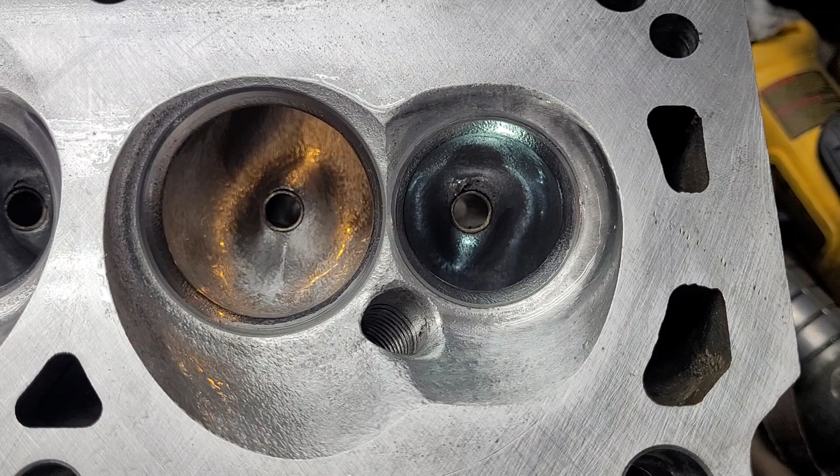Okay guys, final on the AFR Enforcer clone heads, the 20816. I was able to squeeze a tiny back cut on the intakes. No back cut on the exhaust - I tested it with a back cut, and it was not good.

If you take a good look at the chamber, you can see it's textured in some spots and baby smooth in other spots. It's all for a reason. Eric did a nice video on textures and what he feels they do in certain spots - it's quite a good video.

These turned out pretty nice. I'm relatively happy with them. They did take more time to finesse than I would have expected, but they turned out nice. I think he'll be very happy with them.

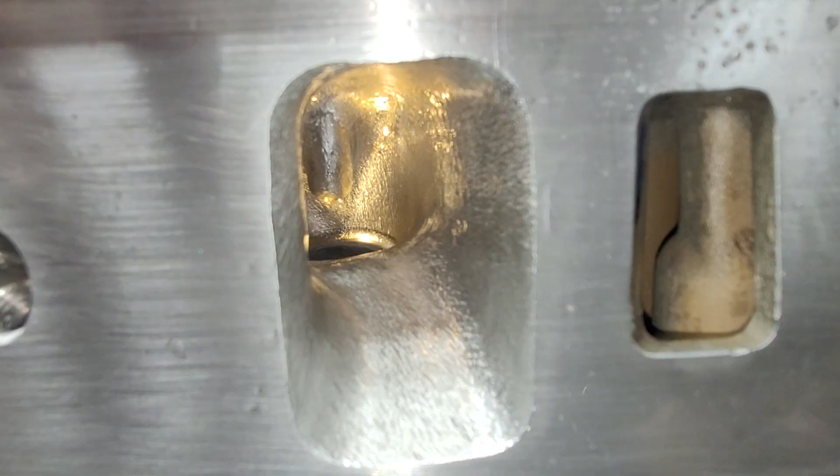All right, I put a coat of oil on everything because these are gonna get shipped out soon, real soon - like they're gonna get put in plastic bags and put in the boxes type soon.

Okay, take a look at the exhaust. The exhaust actually got completely redone. I really wasn't thrilled with how they were running, and I really wasn't thrilled with the valve seat because it had some serious pitting from the detonation. So I did have to sink the exhaust valve seats a little bit. But since the 208s were brand new, I left them as high as I possibly could.

So the chamber CC came out right about, I think it was 61, which is good. I think they come from the factory at like 58 - I may be wrong with that, but that was actually from the AFR website, 58. And after I do my chamber work on it, that's definitely going to open it up a few cc's. So 61 sounds right.

Let's take that shot with a little bit of light on it. Even though it's aluminum, I like to put oil on it because the aluminum starts to change color - it gets a little oxidation in it and it looks like crap.

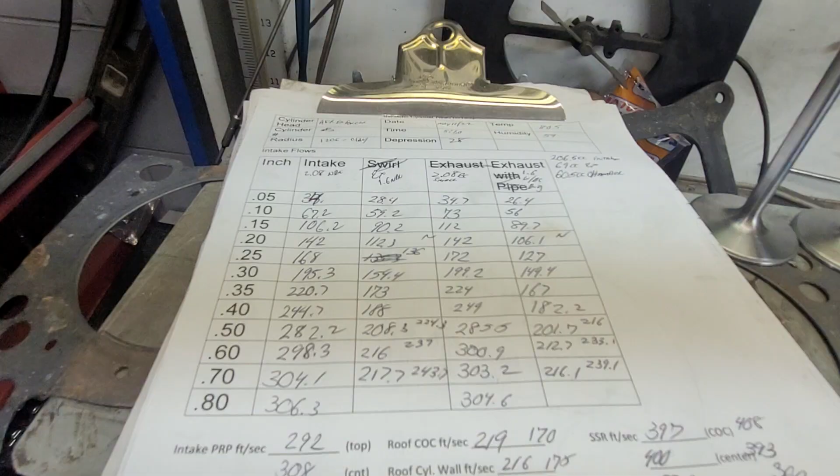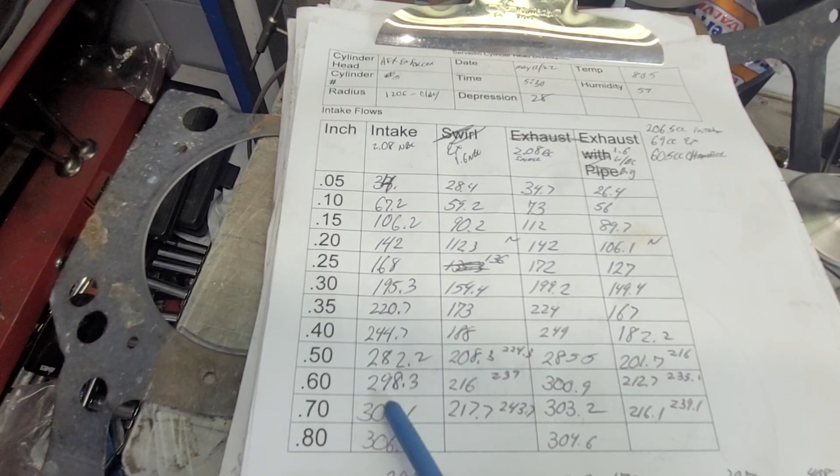Okay, let's see what we can do with this. This is a 208, no back cut. They're up a little bit from last time you guys saw them - not a huge difference, but I got some decent gains.

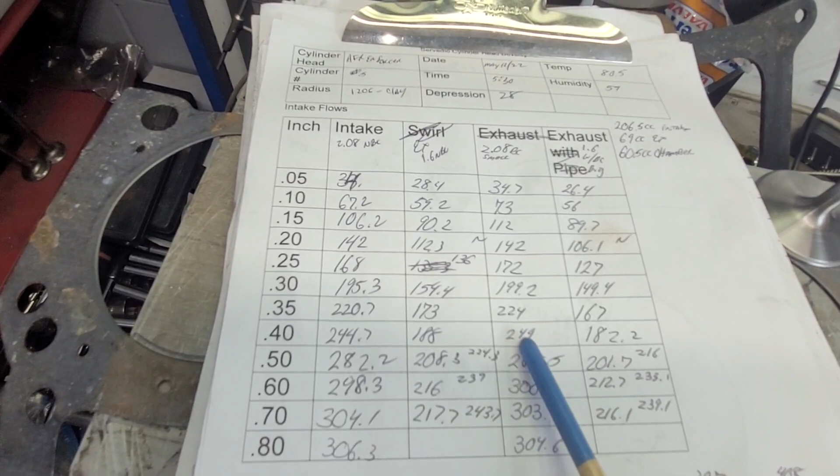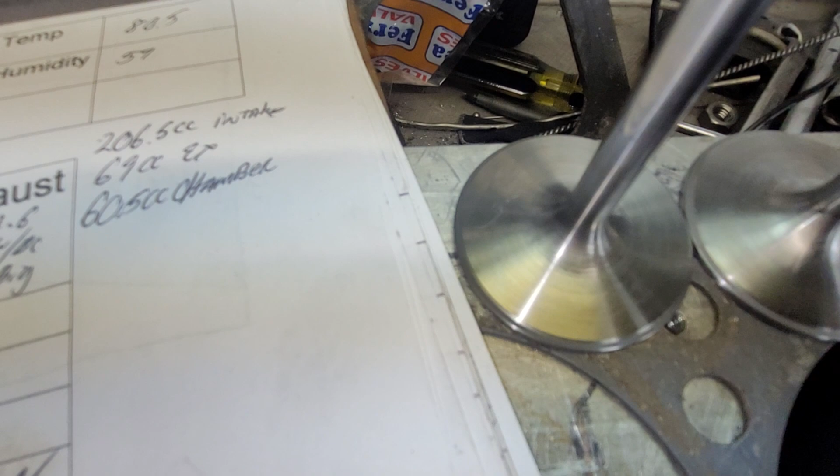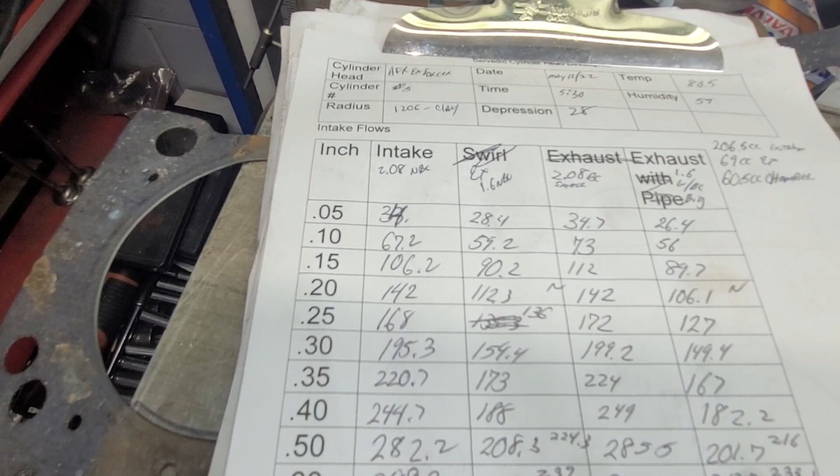Coming down, a couple CFM here and there. But the back cut wound up being a very small back cut - you can only put a tiny back cut on it because of the style valve it is. But it did help, and it brought up my mid-range a little bit, which I was happy about. And right where he's running, we're still around 300 CFM.

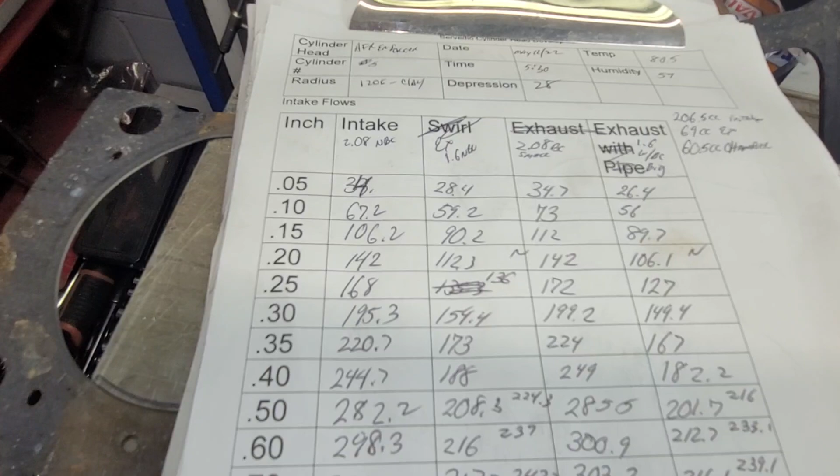So with the intake manifold, we got about 288 last time. They're pretty good, I'm pretty happy with them.

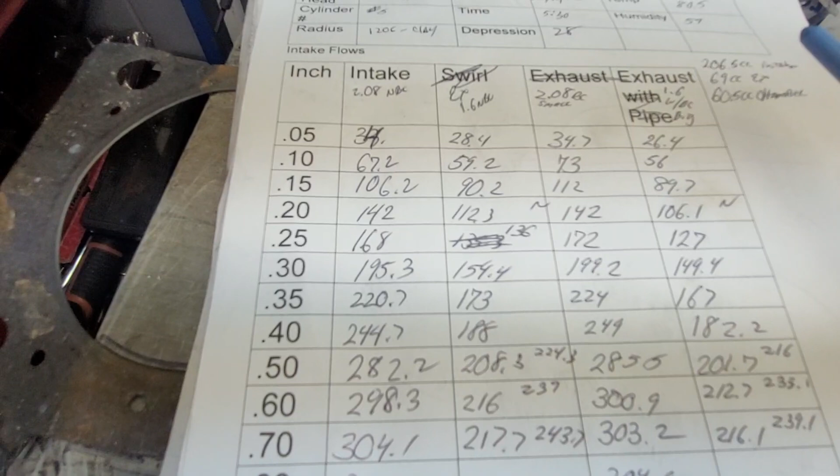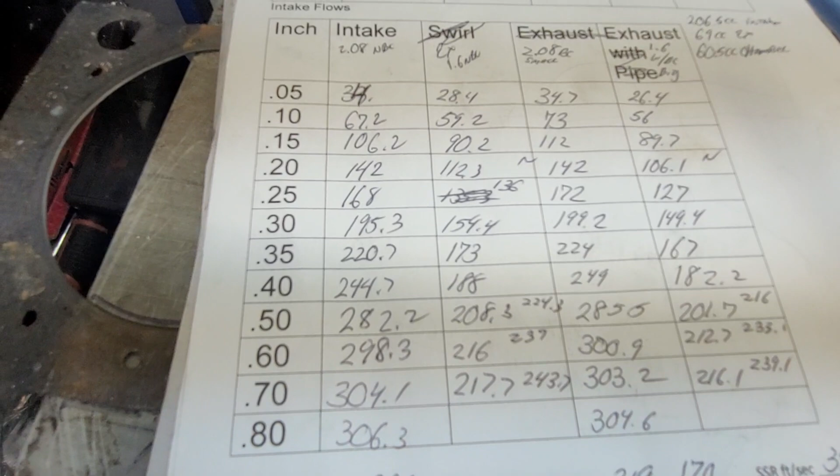Now, I did want to talk about how you know you're done. This is something that Charlie has a big problem with - when are you done with the cylinder head? I think I talked about this one other time, but you're done - well, this is like a rule of thumb from me - you're done when you've got the size about where you want it to be.

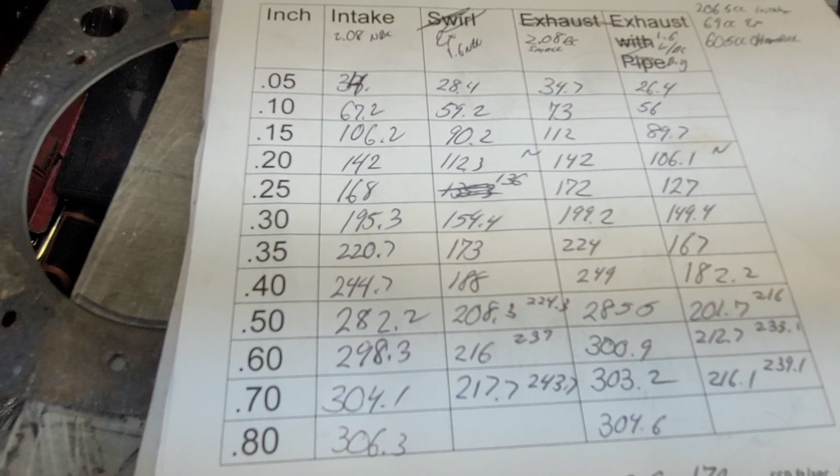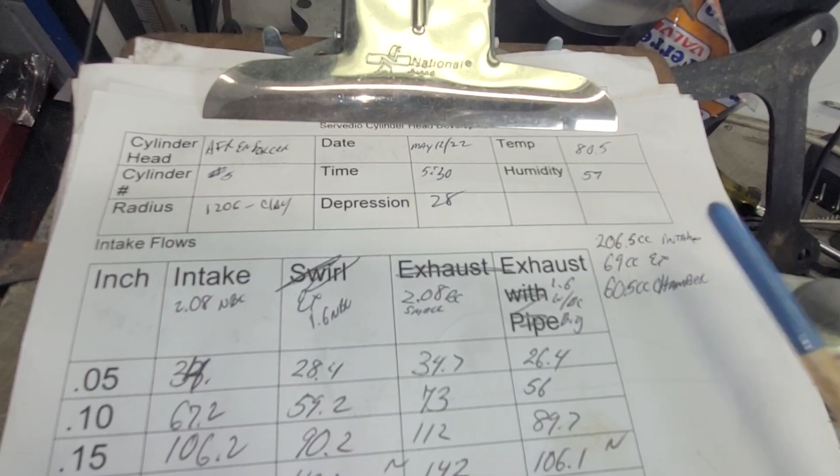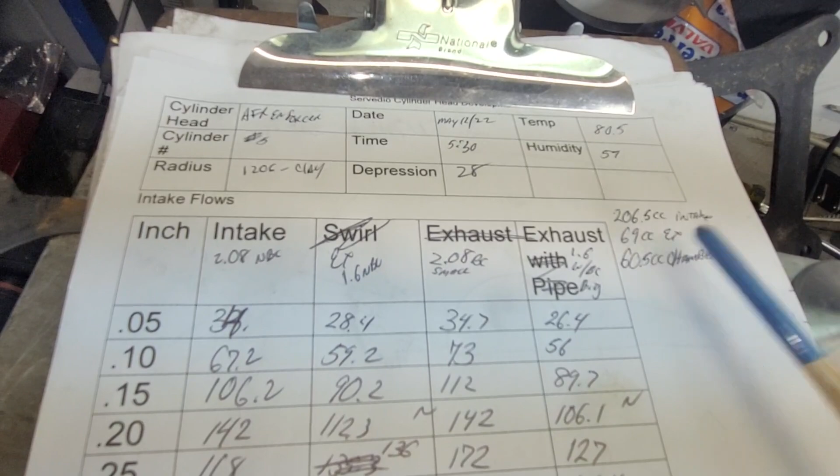Now, these ports came out - I wrote 206, I thought it was 205.5. All right, I wrote 206, so they're 206.5 cc's. And the exhaust came out at 69. Oh, I got a 60.5 cc chamber.

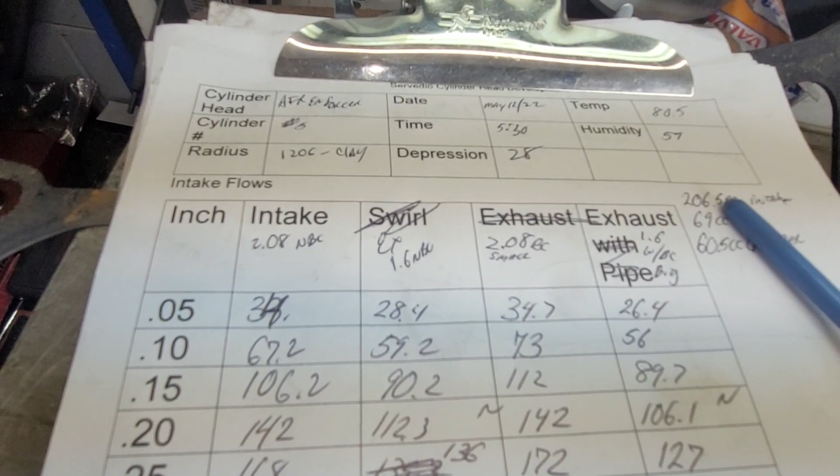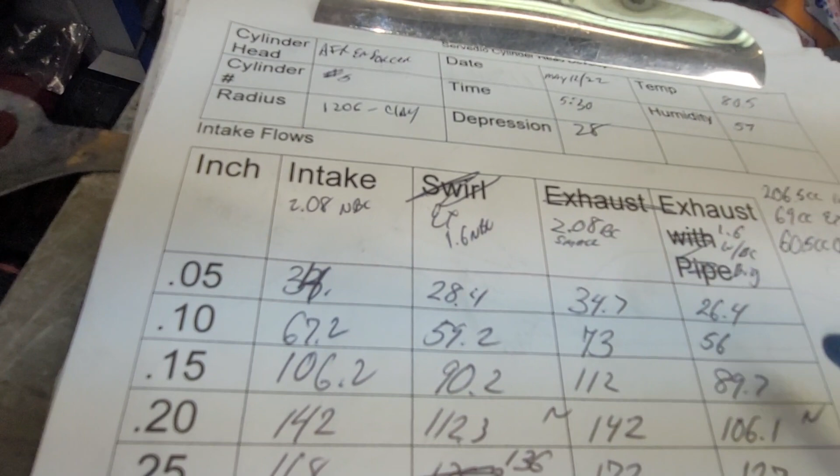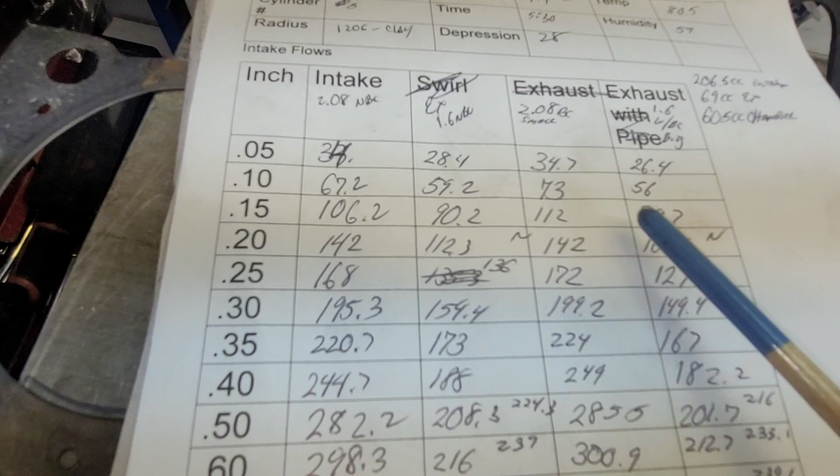Now, you get to the point where you really don't want to make the port any bigger. But if you go through and you check your air speeds and you're like, okay, I can change a few things here and there and get my air speeds a little better, and you do, and the air speeds either don't get better or your flow doesn't go up, you're pretty much done. Because at that point, you're making the port bigger, but you're not getting any meaningful gains out of it. So you're losing at that point.

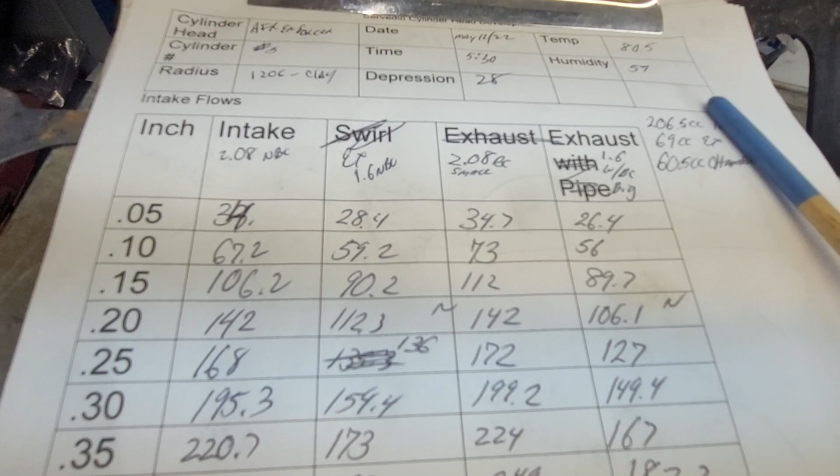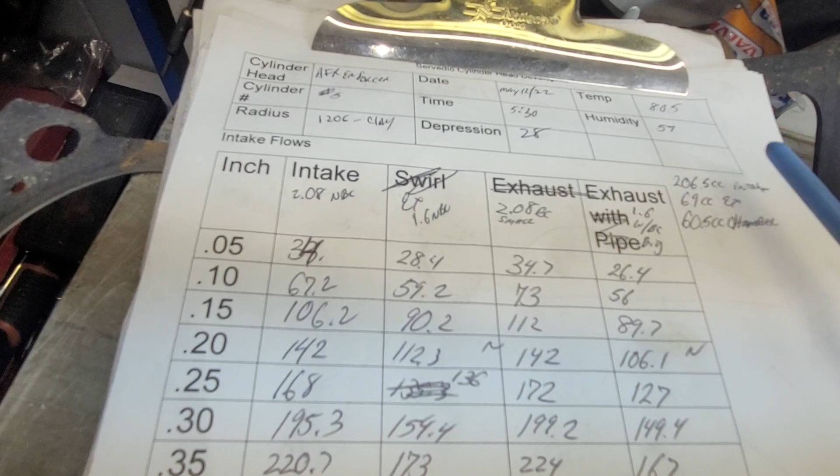Either you have to go in and change a bunch of geometry and make it a bigger port to get more flow out of it, or you're going to call it quits. Now, a 206cc intake on a 393, that'll work - that'll be a nice setup. With the giant intake manifold, he's going to pull mid-range really well.

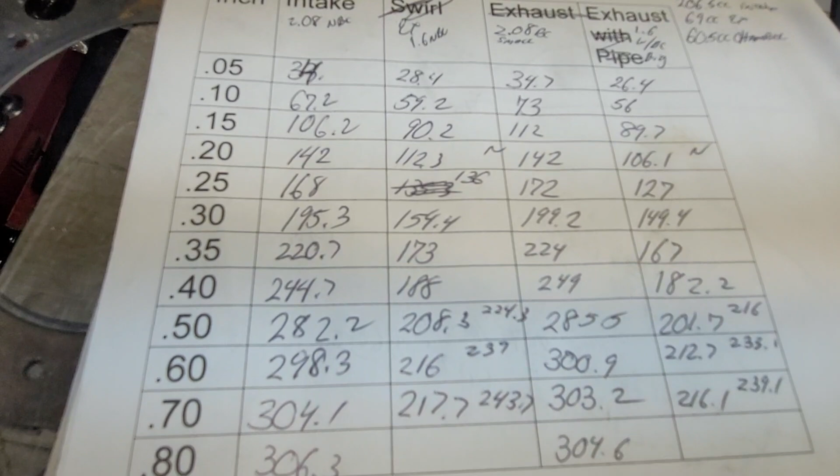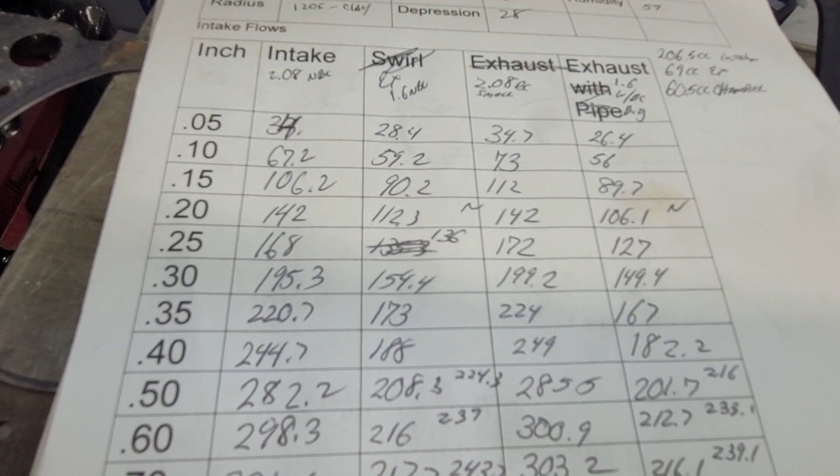These had really good flow up high, so I expect it to have good top end, a really good top end. Yeah, I probably could have fiddled around and got a few more CFM out of them, but I didn't want to hog the chambers out or anything.

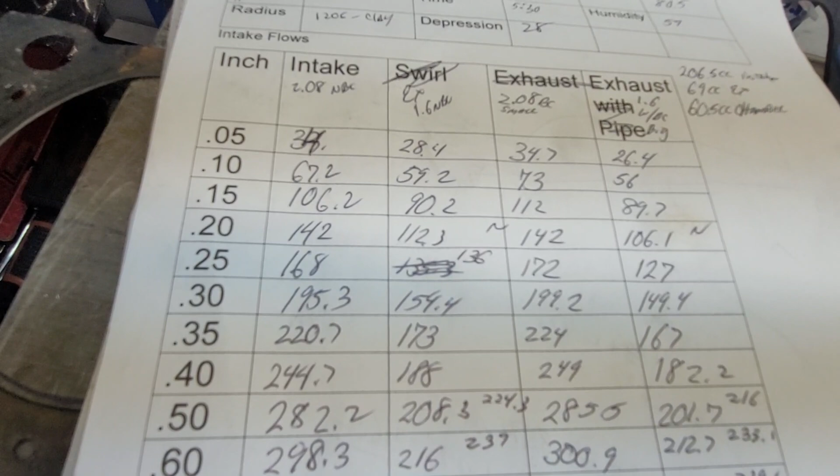Let me pop up an intake and an exhaust in the chamber. You can see how the chamber finished up. You can see how the valves sit in the chamber. You can see how much de-shrouding I did.

I didn't really want to make that chamber any bigger, and I was happy with the air speeds throughout the port. Let's take a look at those.

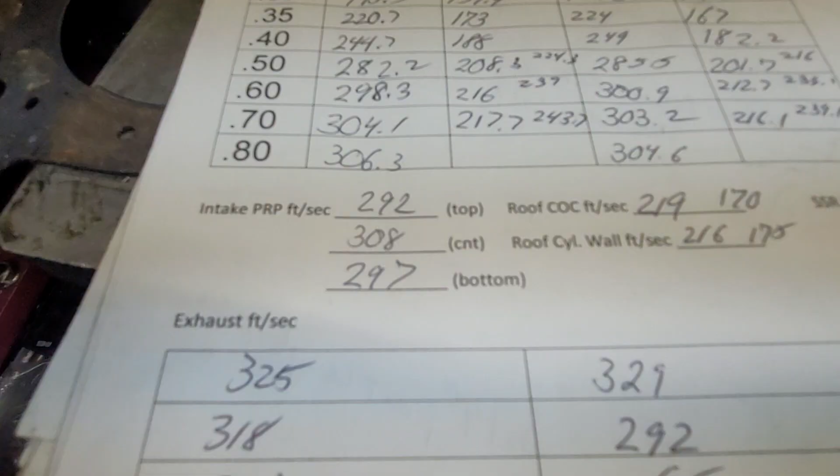All right, as big as the pinch is, it's pretty fast. As far as the roof...

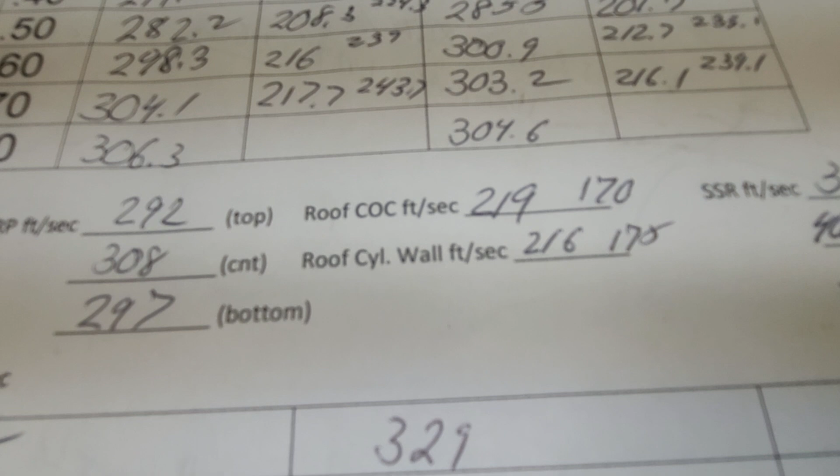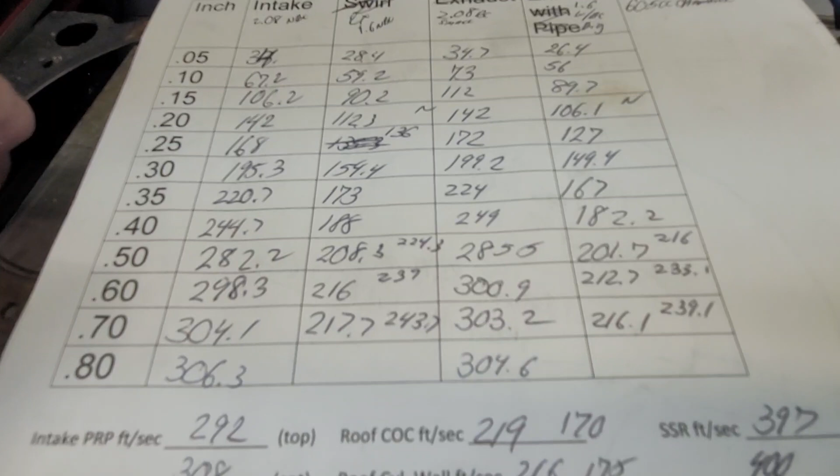Now the air speeds on the right, the 170 and the 175, that's from that little back cut. The little back cut made a big difference in how much air was going around the short side radius. That's why we got a boost in the mid-range. A decent boost in the mid-range. So I was pretty happy with that.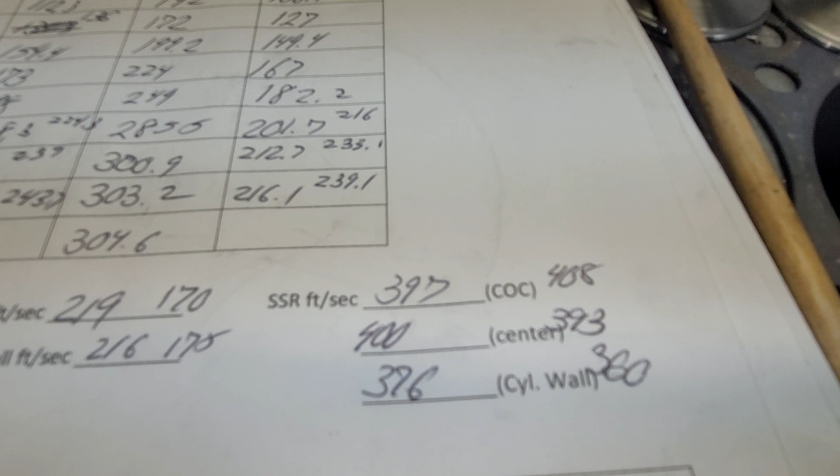Now, take a look at the last numbers for our short side radius speeds. 408, 393, 380. Not bad. Not great, but not bad.

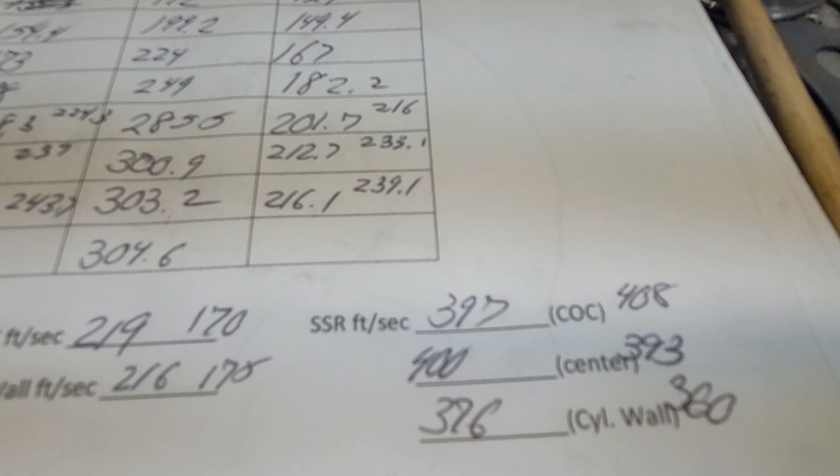And making the port bigger just dropped your cylinder wall number. It really didn't pull any more flow away. So that's when I knew I was done with the short side radius.

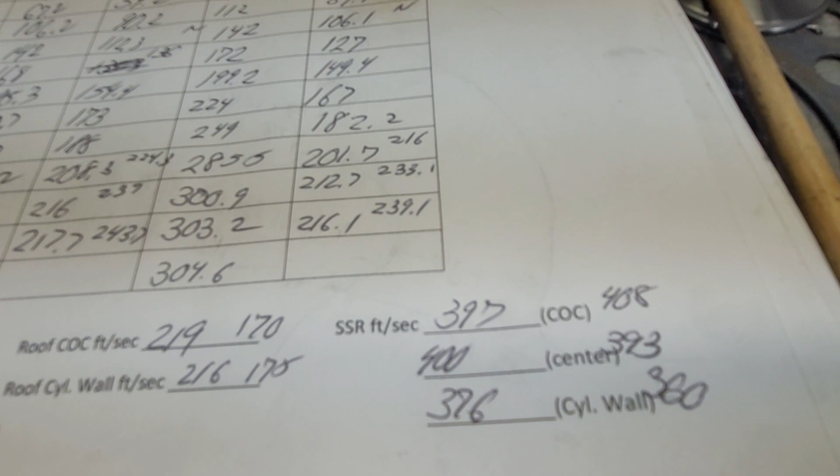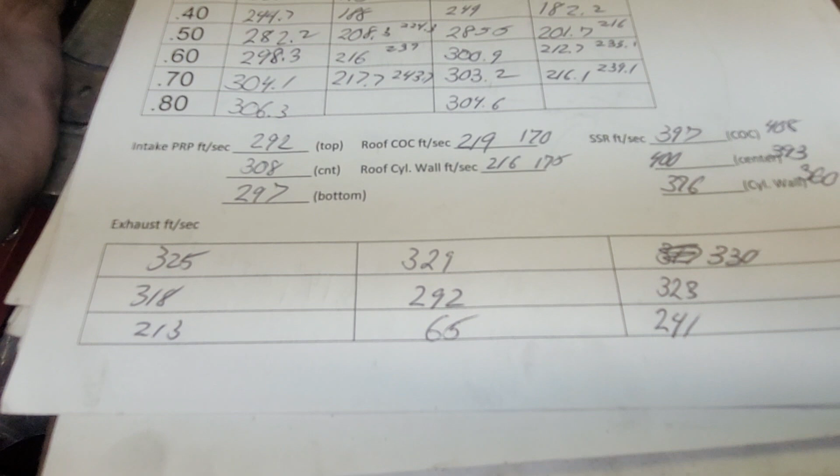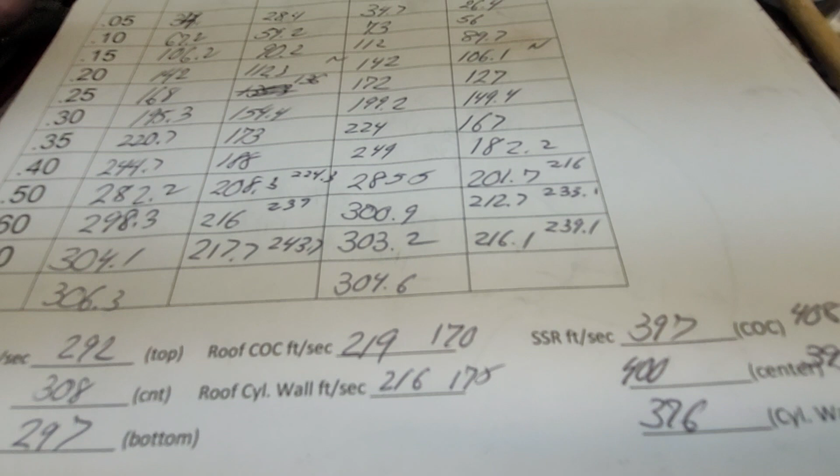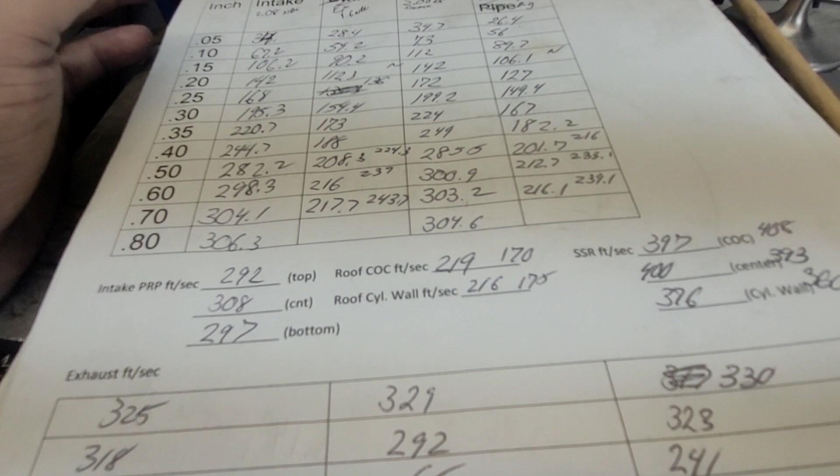How about the exhaust? The exhaust needed a full rework. I radiused the top edge of the exhaust valve. I tried it with a back cut, and it lost pretty much everywhere. I mean, a big loss. So it doesn't want a back cut on there at all. So that was obviously with a different valve.

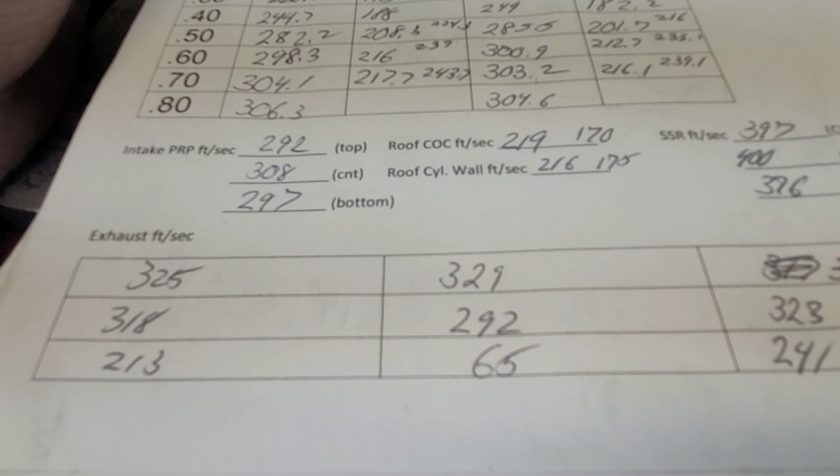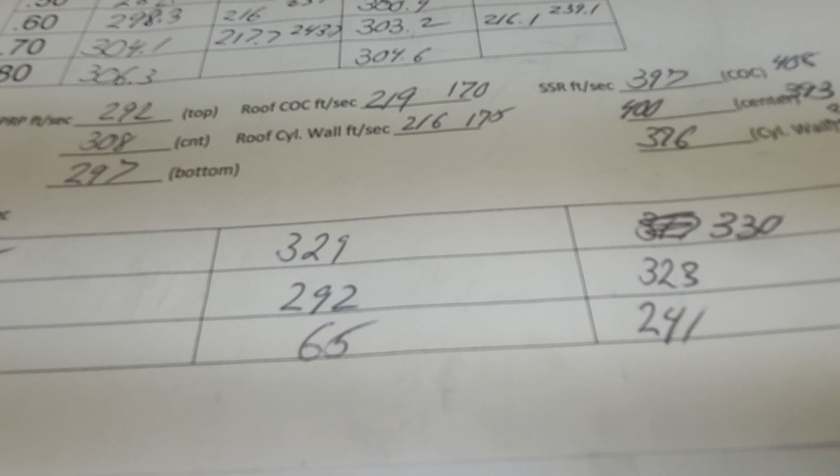But as far as air speeds, take a look at the top row, right? Fast. Middle row, fast and pretty darn even. Bottom row, except for the center, those outside corners have good speed on them. So that port's moving air pretty efficiently.

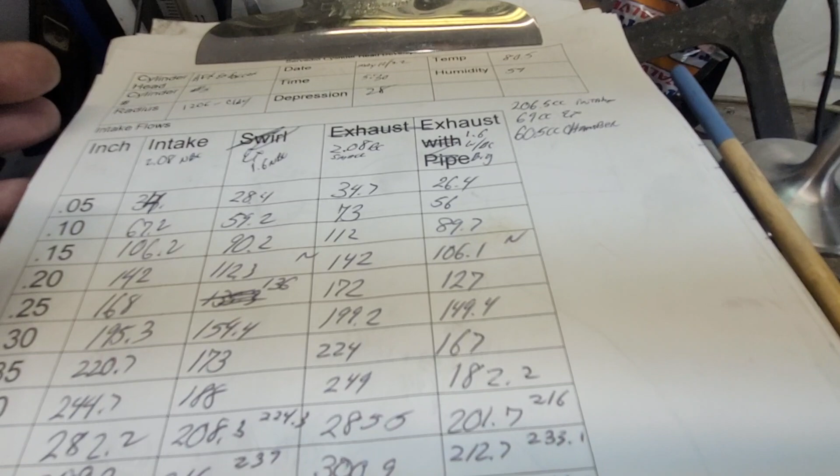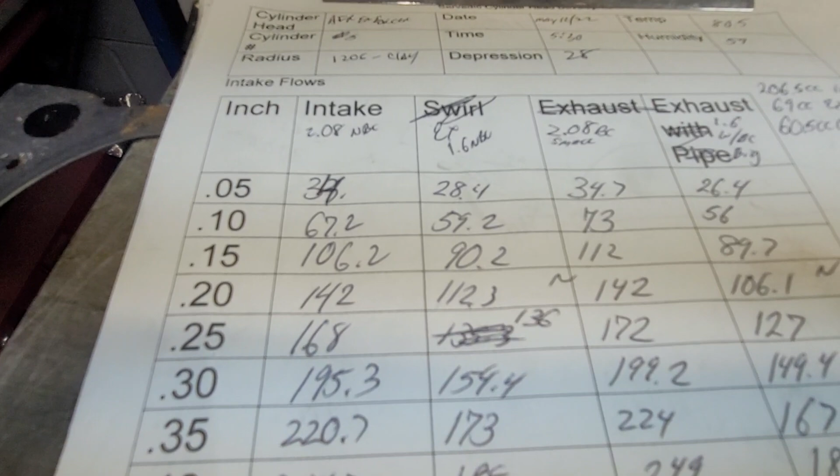If we take a look at our exhaust flows, this is the one we need to look at. So we max out at 700. We're doing 217, but you put a pipe on there and you're 243 and change, which is not bad.

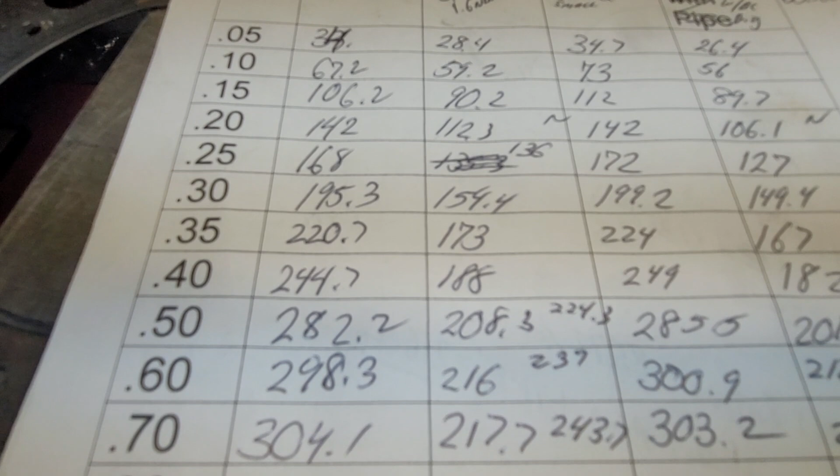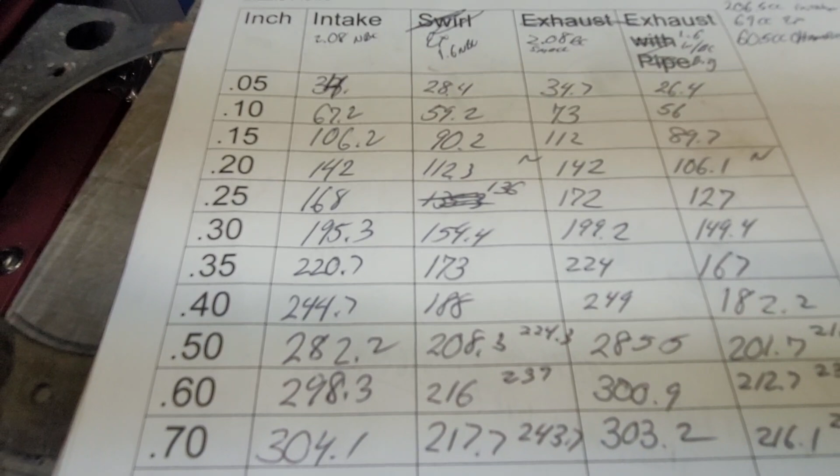You got to remember it's a small exhaust port. I like the small exhaust ports, right? I would much rather have a small fast exhaust port than a big lazy exhaust port any day of the week. Helps your reversion, helps you come up on cam more, and hangs on higher in the RPM range. All important things. Yeah, exhaust port efficiency is really big, guys.

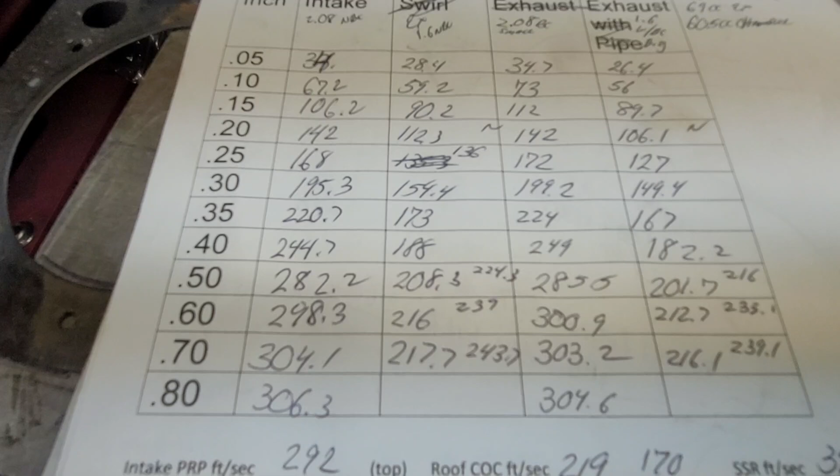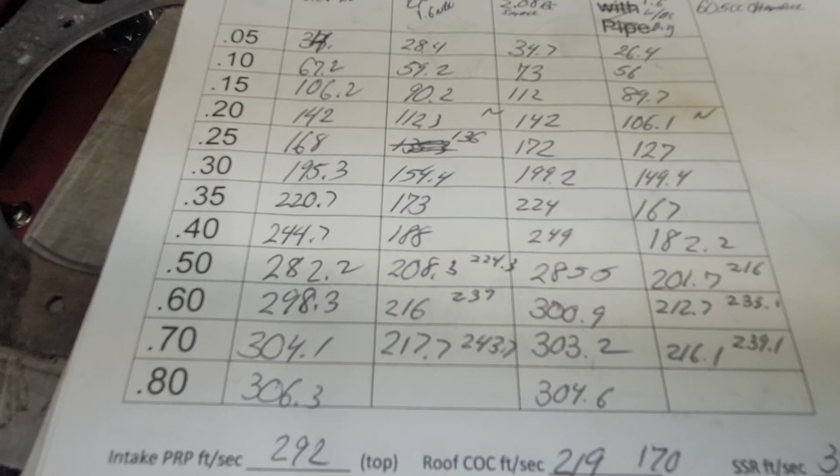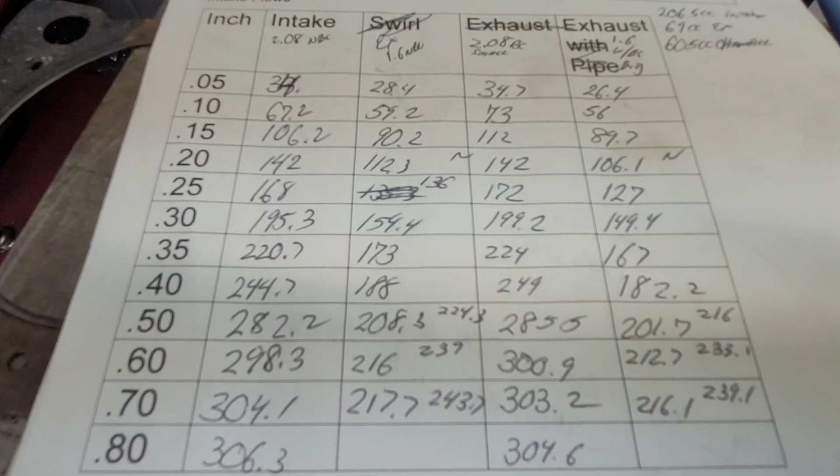And final word: he's going to be hitting these with a 150 shot. So I didn't really change the combustion chamber from the way I would if it was naturally aspirated. I don't feel that 150 shot is worth the losses you're going to get by softening that chamber. Let me know if you agree or disagree with that, guys.

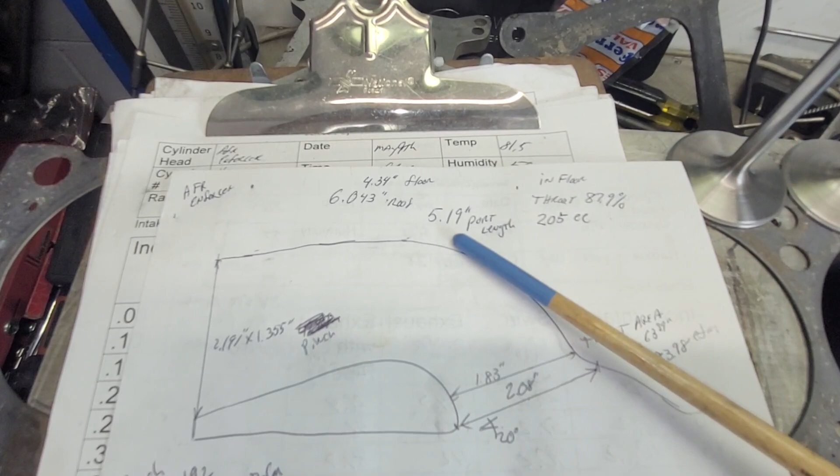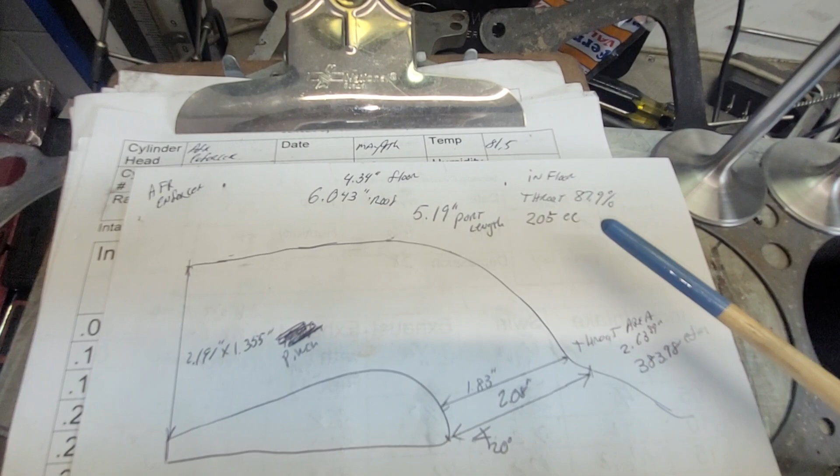Your port length, 5.19 inches. Your intake throat, 87.9%. See, here I have it written at 205. I thought it was a 205.5 cc port. That's the number I'm going to stick with. I remember it being 205.5. I just wrote 206 on the other one.

Okay, take a look. 2.08 valve. This picture doesn't look quite right because the solder I use doesn't bend quite right. It looks a little funny. But our throat is 1.83 inches.

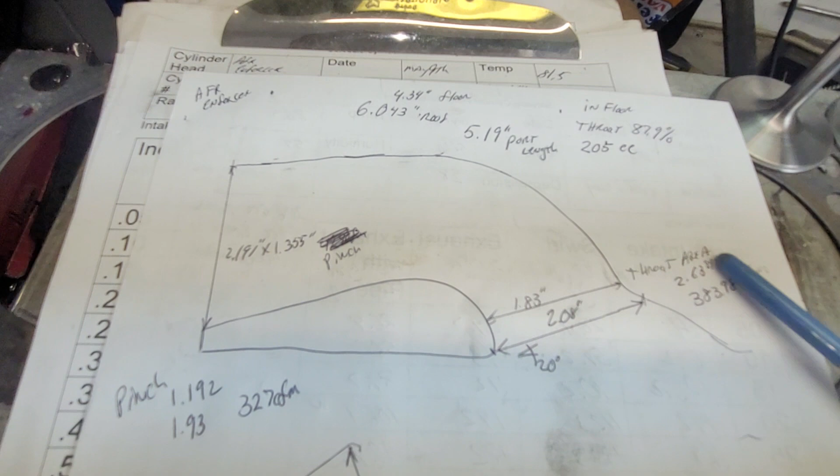And I did a quick calculation to see how much flow you can get out of that much area. That's 383.98 CFM if it was 100% efficiency. Okay.

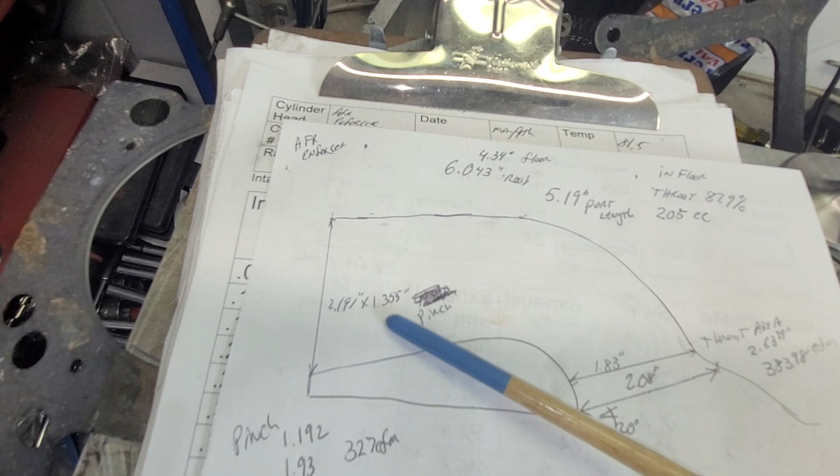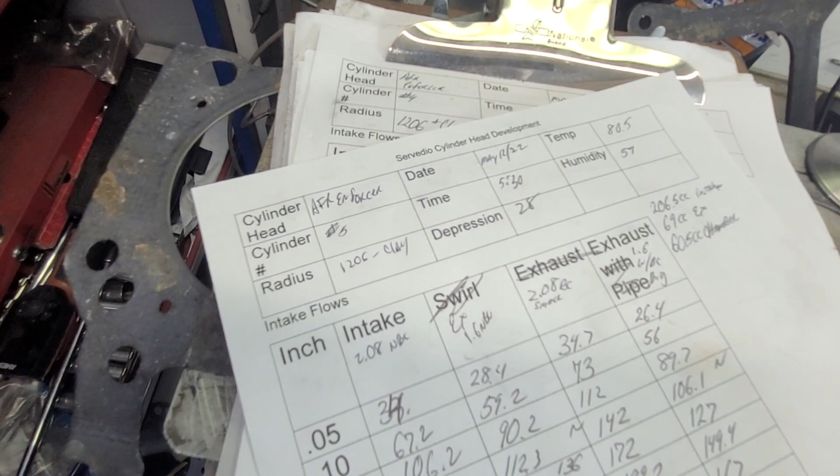Here, our opening is 2.191 by 1.355, and our pinch is 1.192 by 1.93. That calculates up. It'll go 327 CFM, but we maxed out at 303. So we're good. We're good as far as the pinch.

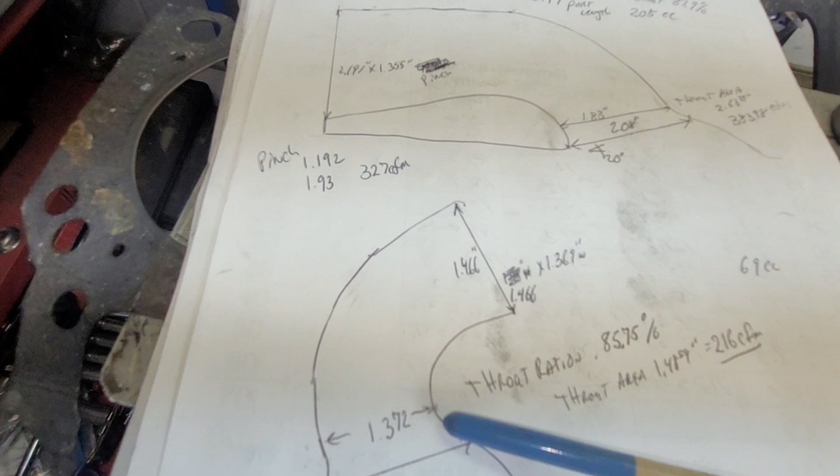Okay, this looks a little funny too on this drawing. Same reason, I just couldn't get the solder to bend, but it's pretty close representation of what we got.

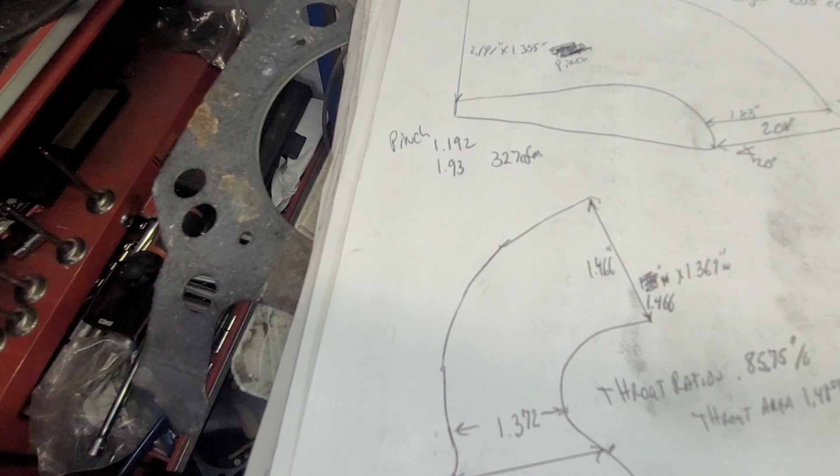We got a 1.6 valve. You got a 1.372 throat, which is 85.75%. My go-to numbers: 88 for your intake, 86 for your exhaust. So these came out pretty close to the numbers that I really like.

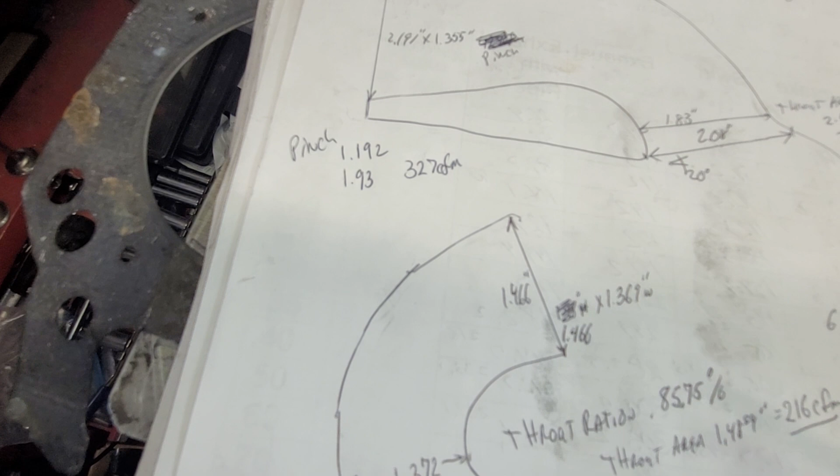Now, those are also numbers for 45-degree seats. These are 45-degree seats. And I did—throat area was 1.48 square inches. According to that, you can only get 216 CFM through it.

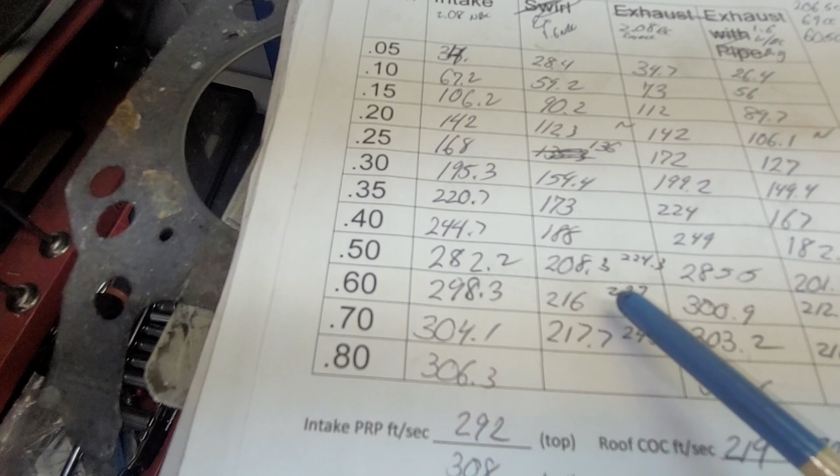216, 217 and change. And then when you put a pipe on it, you get even more.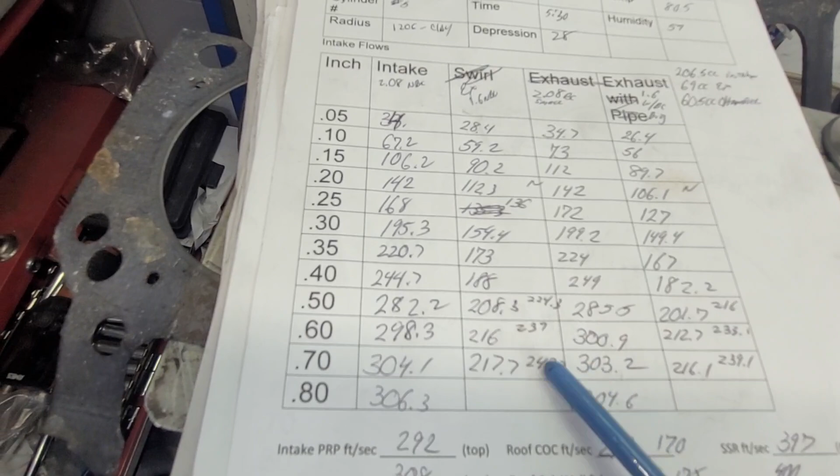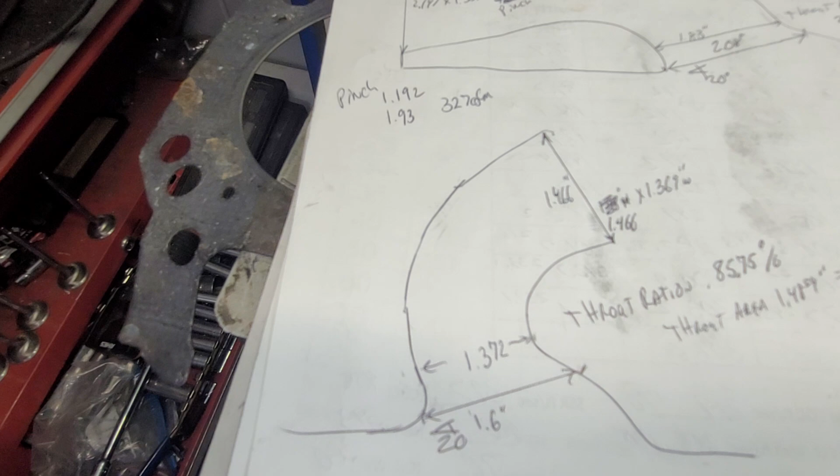So someone in class is going to say, well, Charlie, that's impossible. And what is Charlie going to say? Well, if you take a good look at it, the way it's designed, right? What is it? It's a bent venturi, okay? I've explained this on another video, but it's a good point, and a lot of guys just don't get it. They'll look at that and think there's something wrong somewhere. No, it's not wrong, okay?

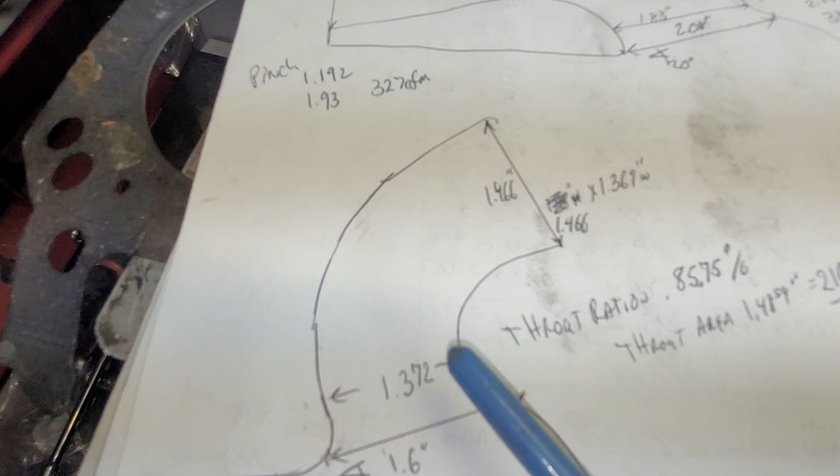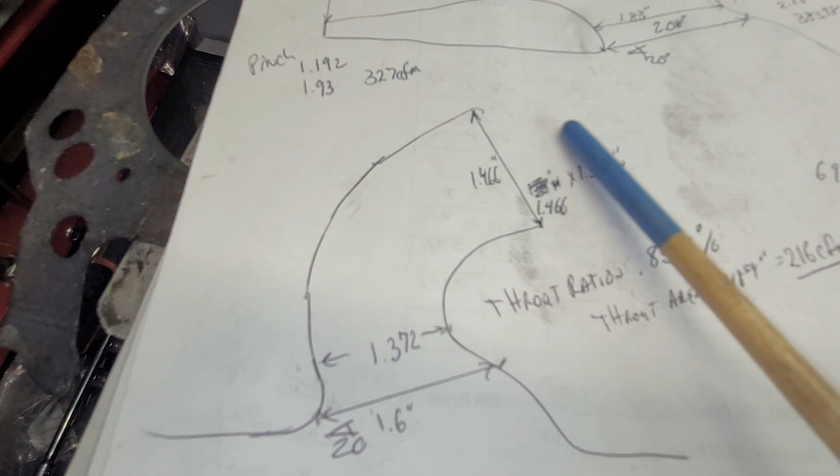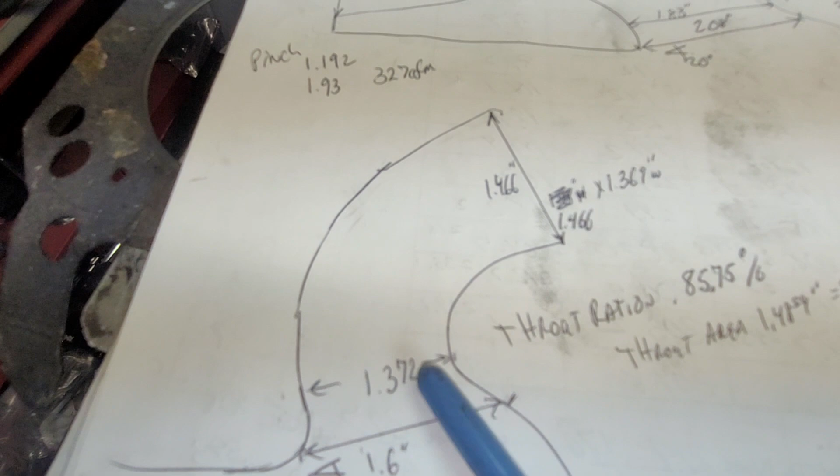If you design it right, where it's a good venturi, what will happen to the air pressure at your minimum area, which is your throat? The airspeed will go up, so what happens to your pressure according to Bernoulli? It goes down. So instead of blowing 28 CFM, 28 inches of water through it, that point sees a higher depression. It may be 31, it may be 32, I don't know what it is. We could calculate it and figure it out, but I'm not doing that today. In any case, we can get more than 100% efficiency out of it. Now remember, I did that area, I didn't even remove the area for the valve stem, so it's less than that, right? It's a good point to make.

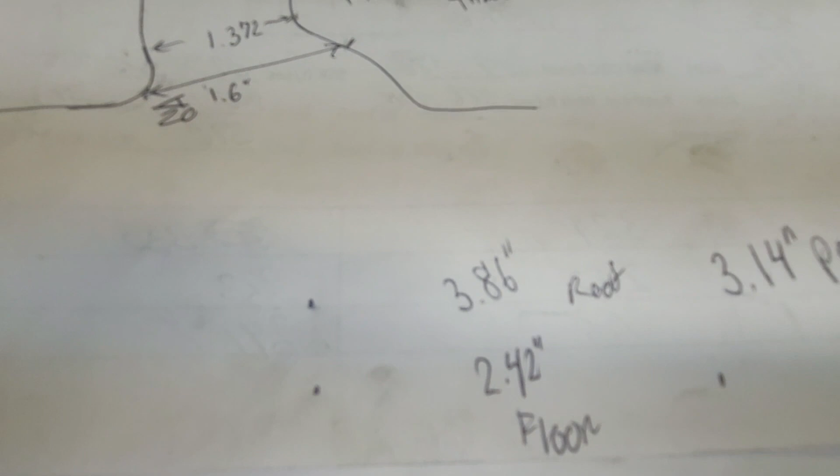All right, let's see. Our port length, 3.14 inches, 69 cc. Relatively small outlet. This outlet size did not change. It's exactly the same size as when I got the heads, because he had a nice fit on with the headers. So that's the way they're going to stay.

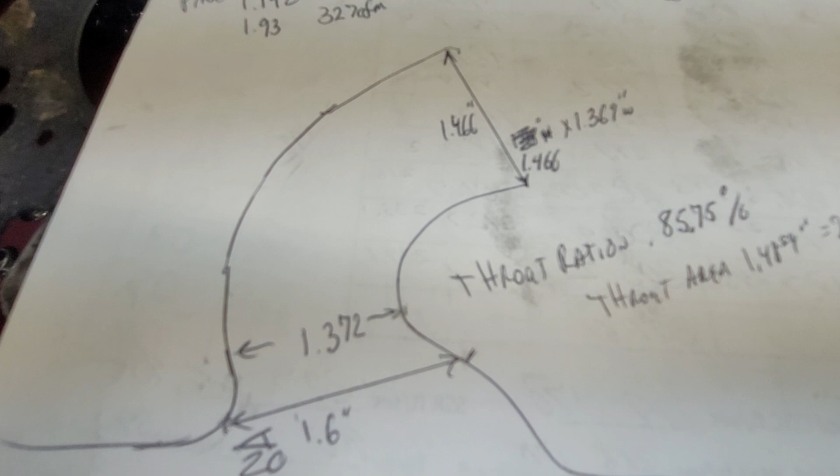Intake manifold hasn't been changed since last time you've seen it. I bolted everything together to make sure we have a good amount of anti-reversion edge between the intake manifold and the cylinder head and the gaskets. That all looked pretty darn good.

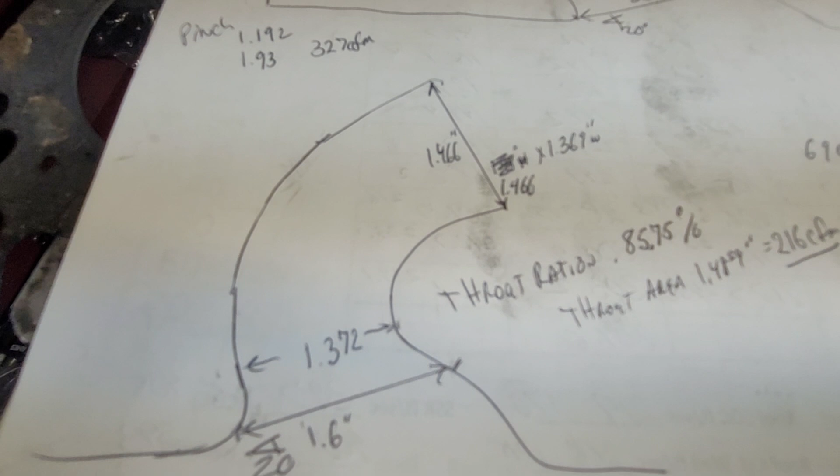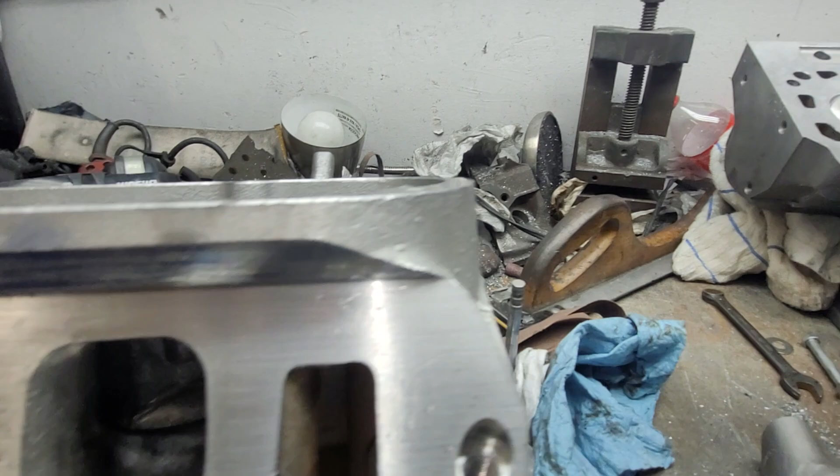I did have to do a little work on the intake manifold, let me show you that. I had to machine this edge on both sides of the intake manifold to even get it to fit, because these heads have this big angled edge and they interfered. So instead of machining this, I don't want to machine that - there's plenty of metal here. I can remove that without too much trouble. So I had to remove that edge even to get them to fit together to check everything.

All right, guys, I'm pretty sure this is the last time you guys are going to see these. Hopefully the customer will give us a full report. Oh, I did want to mention one thing.

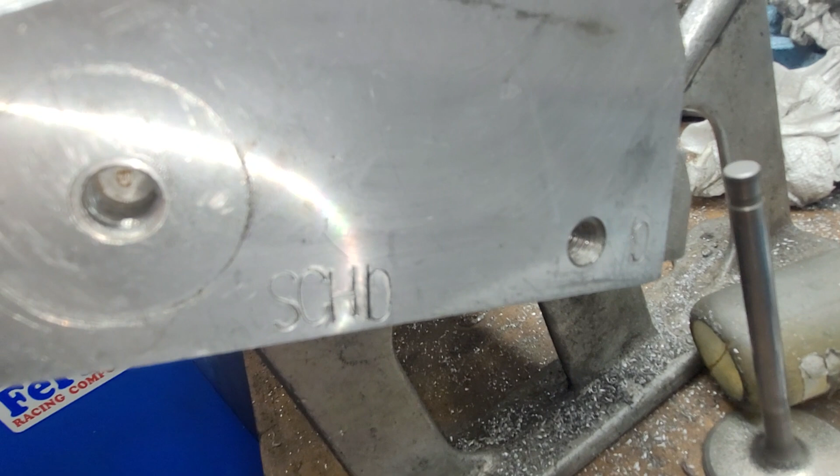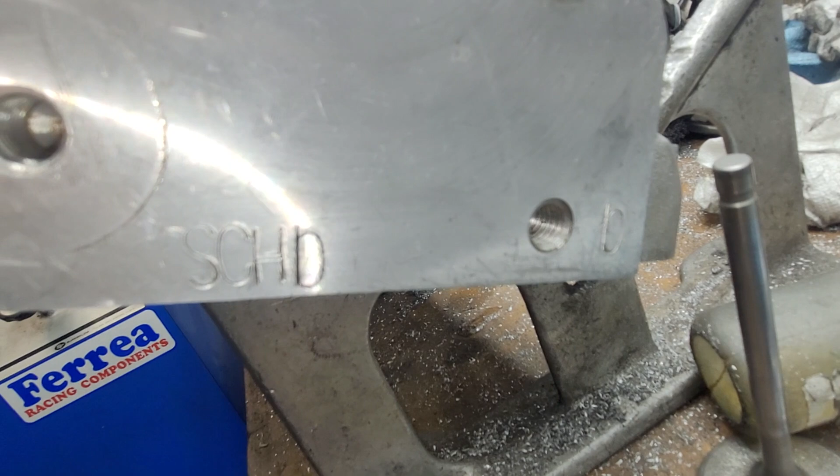My stuff's going to be stamped - Servidio cylinder head development. Yeah, the D is not really a perfect D. For some reason, my D is in Big Mikey's garage somewhere, so I had to use a C with an I to make a D. And this D represents driver's side, okay? The other head has got a P for passenger side, because it does make a difference as far as how the intake manifold lines up. So, I mean, it really would have been nice if I had a 351 block - I could have bolted it all together and really got it perfect, but I don't have that here right now.

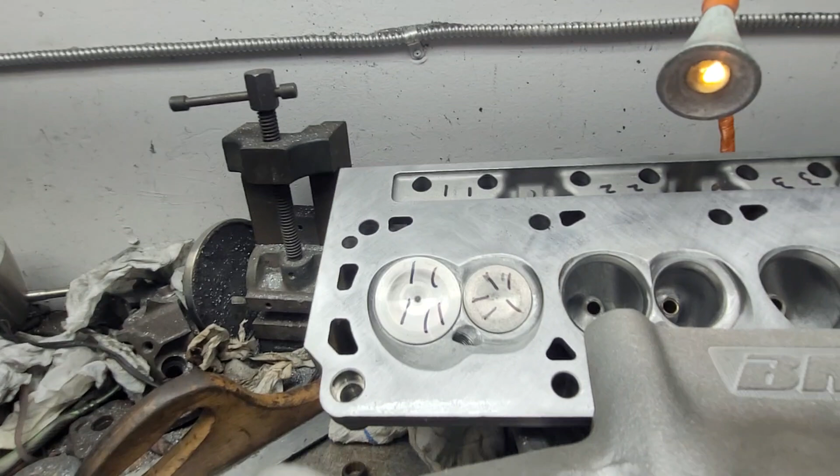All right, guys, thanks for hanging out. It was a good project. I think this is going to run really well. Let me know what your opinion of what I did and what I should have changed, because there's always opinions, right? And I'm good with that.

As far as like the deck on here, they had needed quite a bit of sanding, because the center cylinders that would naturally run hotter had more detonation damage on both heads. So I had to do quite a bit of sanding. There's a couple spots where I took a little piece of metal out with the burr, but there won't be any problem. All right, guys, if the customer has any questions, just give me a buzz.